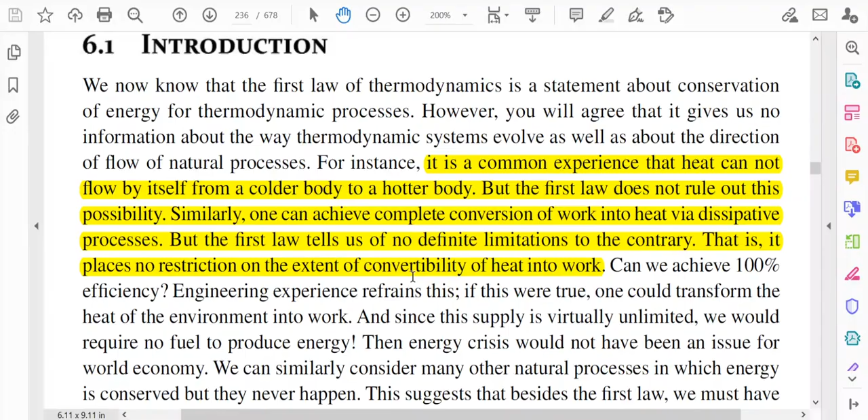So to discuss the second law of thermodynamics, at first we should have some concept of heat engines. We know that heat flows spontaneously from a hotter body to a colder body, just as we were discussing. If we intercept this flow with a machine, some of the heat can be converted into work.

So what is a heat engine? A machine that can convert heat into work is said to be a heat engine. That is the definition of heat engine.

Another thing is that if a heat engine operates, it should absorb heat at a higher temperature and reject heat at a lower temperature. Thus, a heat engine has to operate between two heat reservoirs.

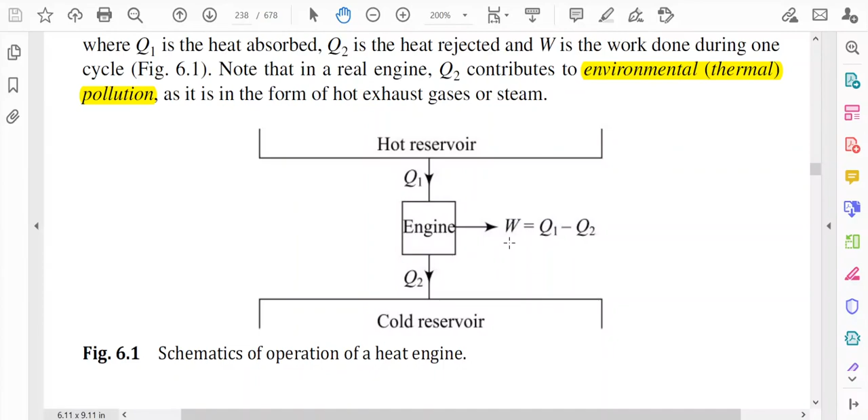Let us look at the figure. This is the schematic of operation of a heat engine. This one is the hot reservoir and this one is the cold reservoir. This is the engine. It is taking heat from the hot reservoir Q1, and it is rejecting heat Q2 to the cold reservoir, and the work performed by the engine W is equal to Q1 minus Q2.

Another thing about heat engines is that the processes which take place inside an engine must not cause permanent changes. This means that an engine has to operate in a cycle. How it operates in a cycle, we will discuss later on, but the point is that a heat engine should operate in a cycle.

The material used in the operation of an engine is called the working substance. The working substance can be solid, liquid, gas, or some paramagnetic substance.

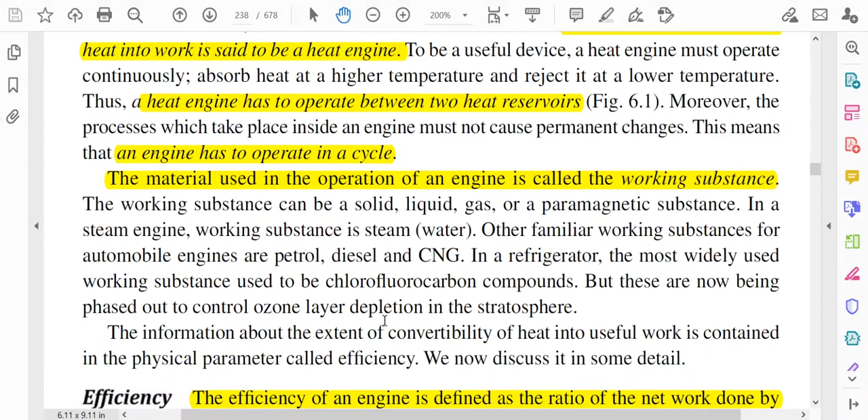In a steam engine, the working substance is steam, that is water. Other familiar working substances for automobile engines are petrol, diesel, CNG, etc. In a refrigerator, the most widely used working substance used to be chlorofluorocarbon compounds, but these are now being phased out to control ozone layer depletion in the stratosphere. So whatever it is, there is some working substance inside the engine.

Now we will define an important parameter, that is the efficiency of an engine. The efficiency of an engine is defined as the ratio of the net work done by it to the heat absorbed during one complete cycle, and the symbol of the efficiency is eta, and eta is equal to useful work done divided by heat absorbed.

After one complete cycle, the engine returns to its original state. Therefore, there will be no change in its internal energy, delta U is equal to 0. So from the first law, we have delta U, that is equal to Q1 minus Q2 minus W, that is equal to 0.

We know the first law is dQ is equal to dU plus dW. So from that concept, we are writing delta U is equal to Q1 minus Q2, that is dQ, minus dW, or we are writing here just W, that is equal to 0. So W is equal to Q1 minus Q2.

Q1 is the heat absorbed and Q2 is the amount of heat rejected. W is the work done during one complete cycle.

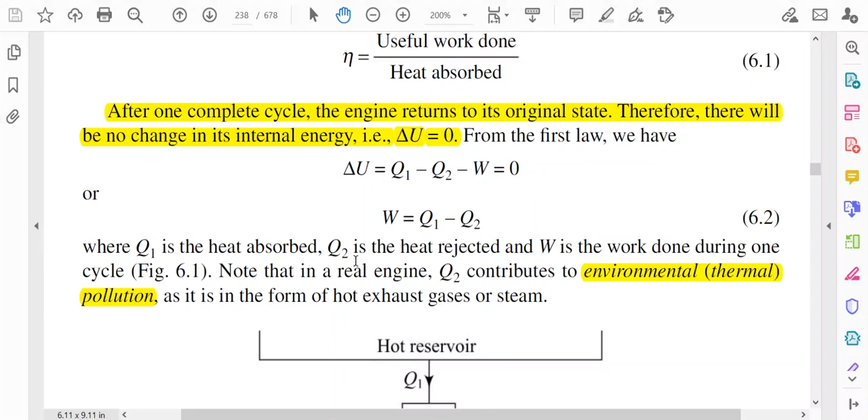Note that in a real engine, Q2 contributes to environmental pollution. Why? Because it is in the form of hot exhaust gases or steam, which is emitted from the engine. As it is being exhausted into the surroundings, the Q2 heat contributes to environmental pollution or thermal pollution.

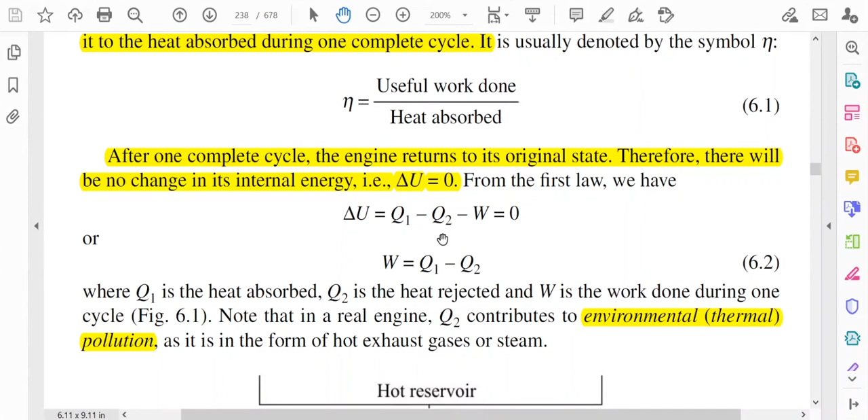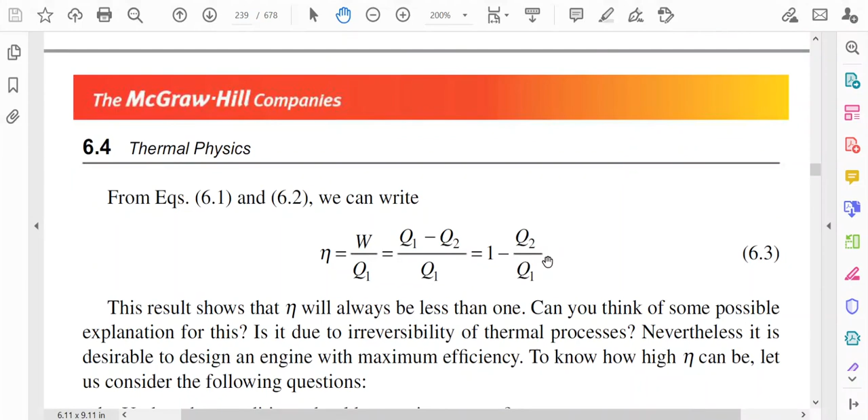Now, if we use these two equations, that is 6.1 and 6.2, you see that useful work done, W is equal to Q1 minus Q2, and what is heat absorbed, that is Q1. If you use some algebraic rearrangement, then from 6.1 and 6.2 we can write eta is equal to W by Q1, which is equal to Q1 minus Q2 divided by Q1, equal to 1 minus Q2 by Q1. This result shows that eta will always be less than 1, because 1 minus Q2 by Q1, these two are positive parameters, so eta must be less than 1.

Now, what is the explanation that eta must be less than 1? Is it due to the irreversibility of thermal processes? Nevertheless, it is desirable to design an engine with maximum efficiency. To know how high eta can be, let us consider the following questions.

So what are the questions? First, under what conditions should an engine operate, and does the choice of a working substance play some role? These are two basic questions. So we will answer this question.

Now, Carnot was the first researcher who recognized that for maximum efficiency, a heat engine should be thermodynamically reversible. That is, all stages of operation should be carried out infinitely slowly so that there are no dissipative losses such as friction or turbulence to waste energy. In practice, however, there are always some losses.

We know that fact. The simplest reversible cycle is due to Carnot. In Carnot engine, the working substance is made to exchange heat with heat reservoirs, and we will discuss the Carnot engine in detail. However, it may be mentioned that any heat engine operating in a Carnot cycle is called a Carnot engine. So that engine which is operated in a Carnot cycle, we will call it Carnot engine. And another important fact is that a heat engine should be thermodynamically reversible to obtain the maximum efficiency.

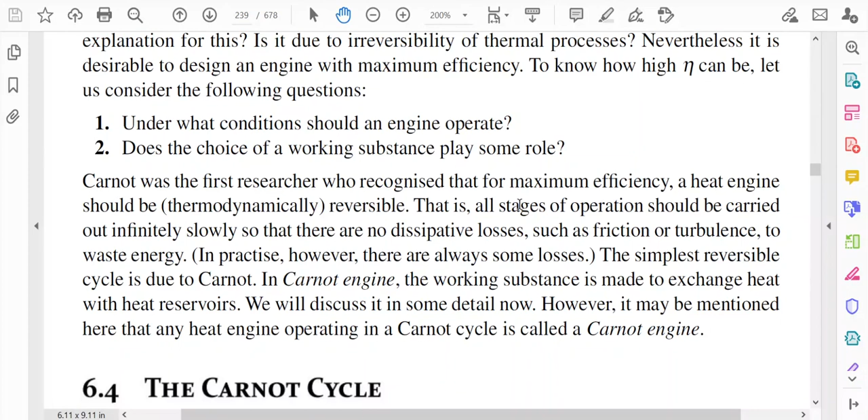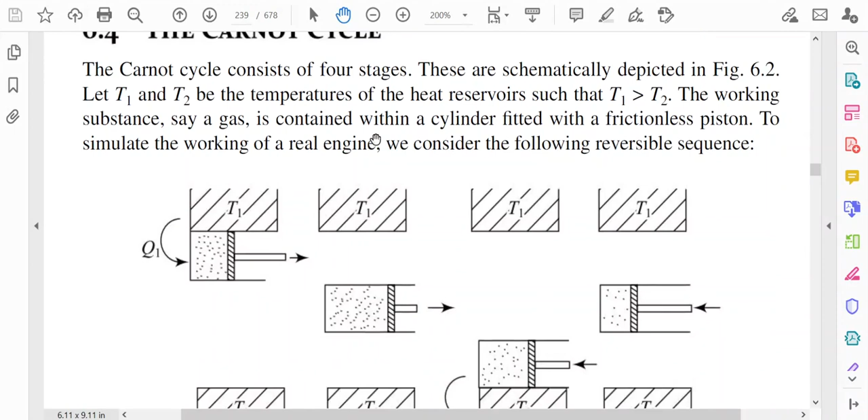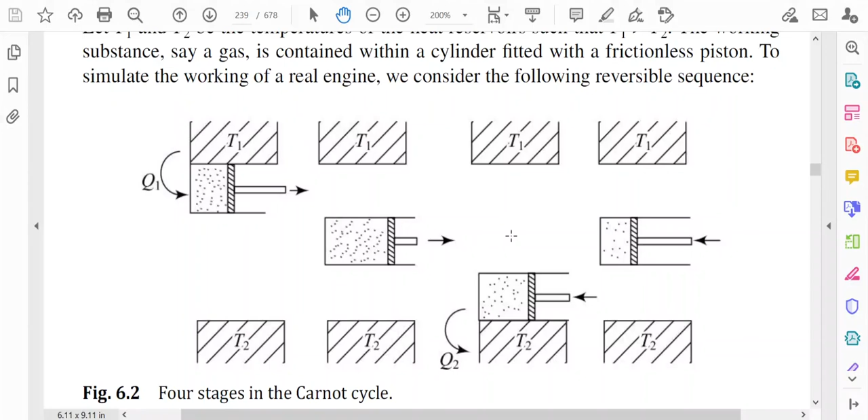Now we will discuss about the Carnot cycle. The Carnot cycle consists of 4 stages. These are depicted in this figure. In this figure, these 4 stages - this is the first stage, this one is the second stage, third stage, and fourth stage - have been depicted here.

T1 and T2 are the temperatures of the hot reservoir and cold reservoir respectively, that is, T1 is greater than T2. The working substance is a gas, contained in a cylinder fitted with a frictionless piston. You see the term frictionless piston, as we are avoiding the dissipative losses.

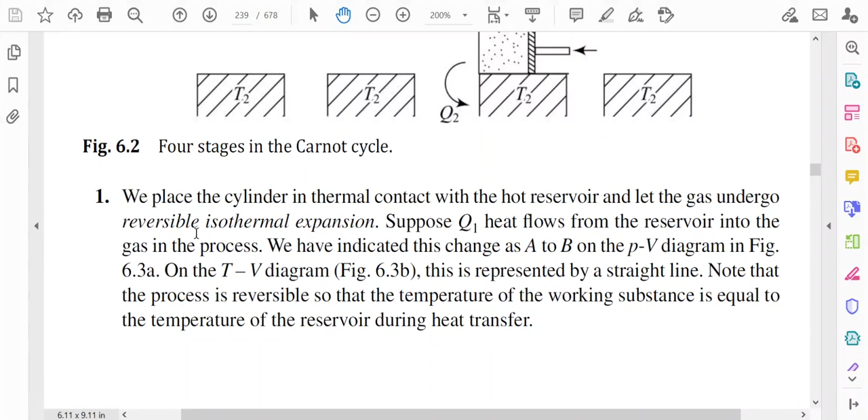To simulate the working of a real engine, we consider the following reversible sequence. This sequence is a reversible one - this is also an important fact. So first step, we place the cylinder in thermal contact with the hot reservoir and let the gas undergo reversible isothermal expansion. So the expansion is isothermal, and we have already said the processes are reversible. So the first process is isothermal expansion.

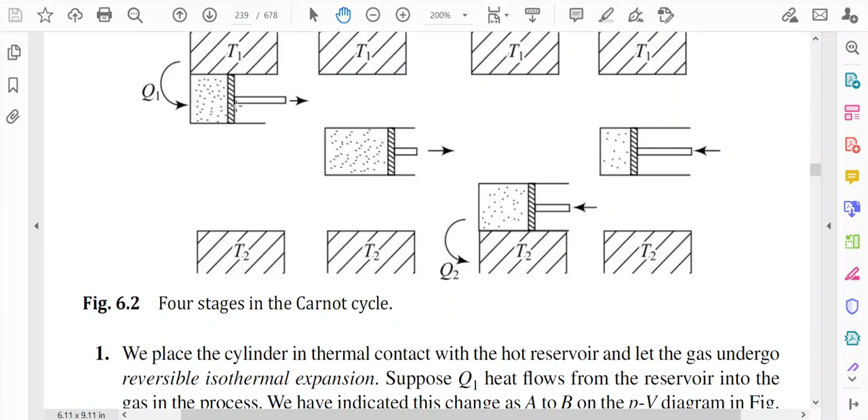You see the cylinder is in touch with the hot reservoir and it is absorbing heat Q1. As a result, the piston moves outward and the gas is being expanded. So this expansion is isothermal expansion. Suppose Q1 heat flows from the reservoir into the gas in the process.

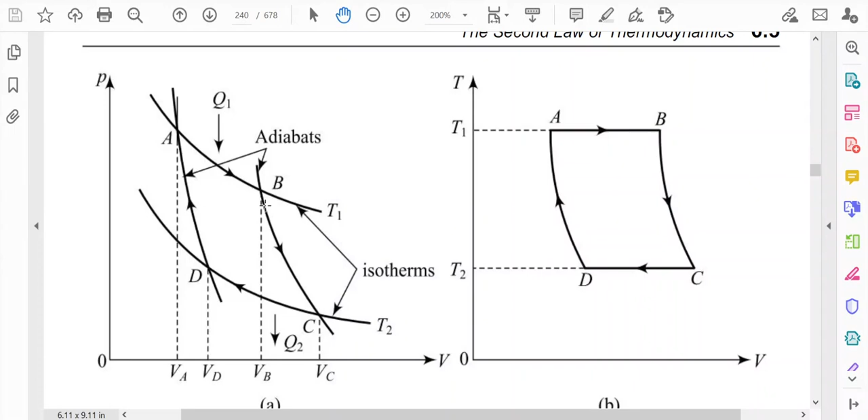We have indicated this change as A to B on the PV diagram. We have shown a diagram, that is the PV diagram - this one is the PV diagram. This AB process is the isothermal process occurring in stage 1, and Q1 is being absorbed by the cylinder, that is why we have shown Q1 in the downward direction. So process AB is the reversible isothermal process.

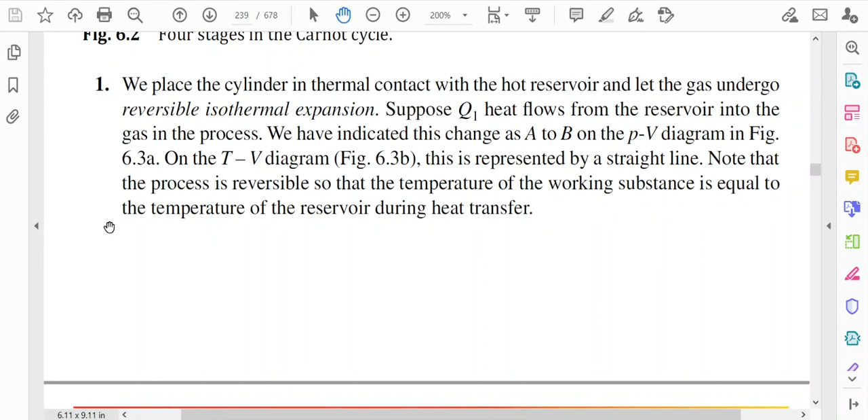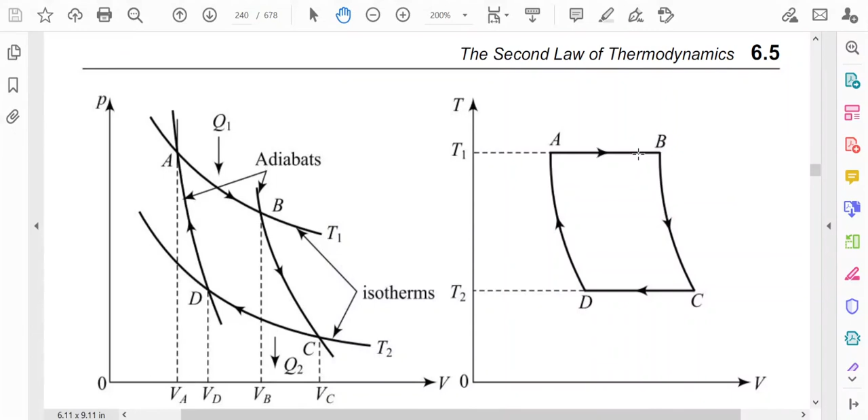On the TV diagram, this is represented by a straight line, and note that the process is reversible so that the temperature of the working substance equals the temperature of the reservoir during heat transfer. As the cylinder is in touch with the hot reservoir, its temperature T1 will be fixed, and temperature is not changing in this process. That is why it is a straight line parallel to the V axis. So this is the process in the TV diagram.

Now the work done by the gas on the surroundings is given by W1 equals integration from A to B of P dV. From the first law of thermodynamics, for an isothermal process W1 equals Q1, since delta U equals 0 — there is no change of internal energy for the reversible isothermal process. That is why W1 equals Q1.

Using the equation of state for n moles of an ideal gas, we write W1 equals Q1, using the ideal gas equation PV equals nRT. So P equals nRT1 by V, and we write nRT1 outside the integration. This gives integration of dV by V, with lower limit VA and upper limit VB. So this equals nRT1 ln(VB/VA). This is the work done in stage 1 of the thermodynamic process, where VB and VA are the volumes of the gas in states B and A respectively.

Next, we thermally isolate the gas and let it undergo reversible adiabatic expansion. This should be reversible as said earlier, but the expansion is now adiabatic, so there will be no heat exchange with the surroundings. The temperature of the working substance falls from T1 to T2, the temperature of the cold reservoir. This change is indicated as B to C on the PV diagram. In this process, work is done by the gas on the surroundings.

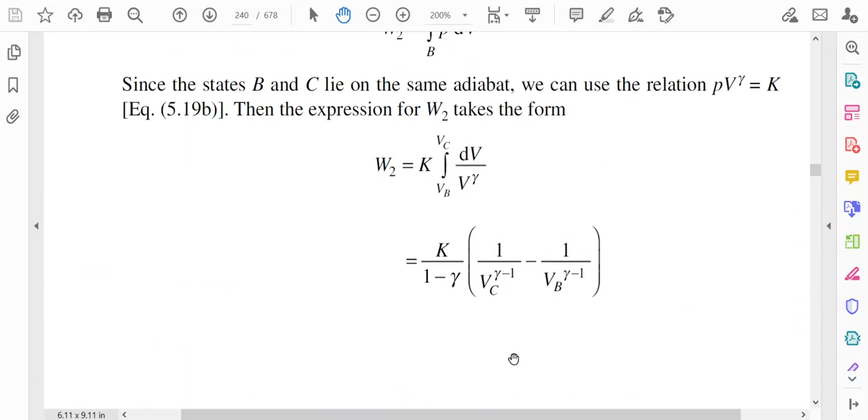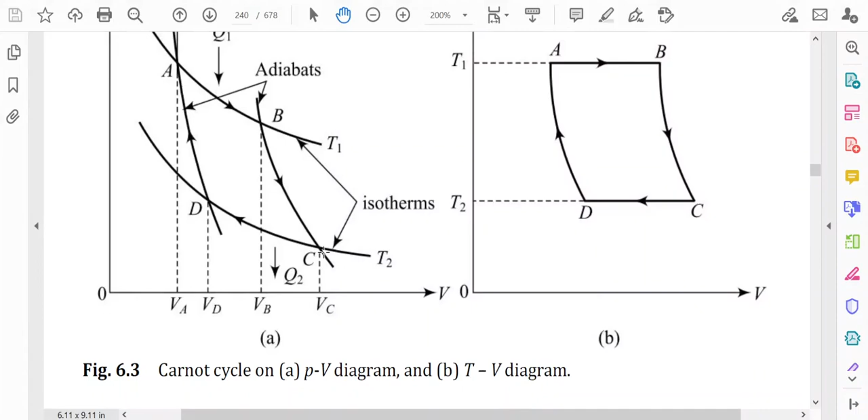This is the amount of work done, and we can simplify this relation further using PV to the power gamma equals K, along with PC VC to the power gamma equals K equals PB VB to the power gamma. This equation gives the amount of work done, shown in the figure. This BC process is a reversible adiabatic process, so PV to the power gamma equals K is valid, where VB is the volume in state B and VC is the volume in state C. So we have calculated the work done in the reversible adiabatic process.

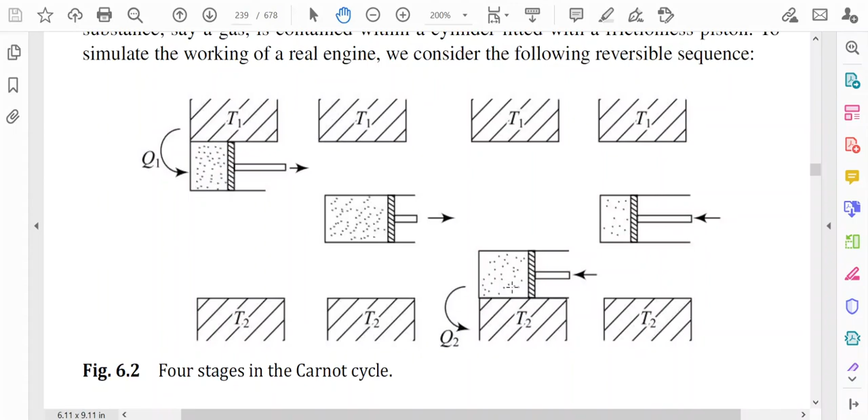Note that the gas is now at relatively low pressure, because the temperature is low, so pressure is also low. Initially it was at temperature T1, but now at state C it is at temperature T2. After the expansion, the temperature lowers step by step from T1 until it equals the temperature of the cooled reservoir, T2. So now the gas is at temperature T2, the temperature of the cooled reservoir, and is in low pressure.

To be used in a cyclic order, the gas has to be restored to its initial state. So our aim is to restore the initial state of the cylinder. To this effect, the gas is compressed in two stages.

First isothermally and then adiabatically, we place the cylinder in thermal contact with the cooled reservoir at lower temperature. Step by step the temperature of the cylinder will be lowered, keeping the cylinder in thermal contact with the low temperature reservoir T2.

So that is why the gas will be ultimately compressed, and we will compress the gas at first isothermally and reversibly. Suppose Q2 heat is given up by the gas to the cold reservoir. This change is indicated as C to D. Let us look at the figure again. You see that now at the point C the temperature is T2, that is the temperature of the cooled reservoir.

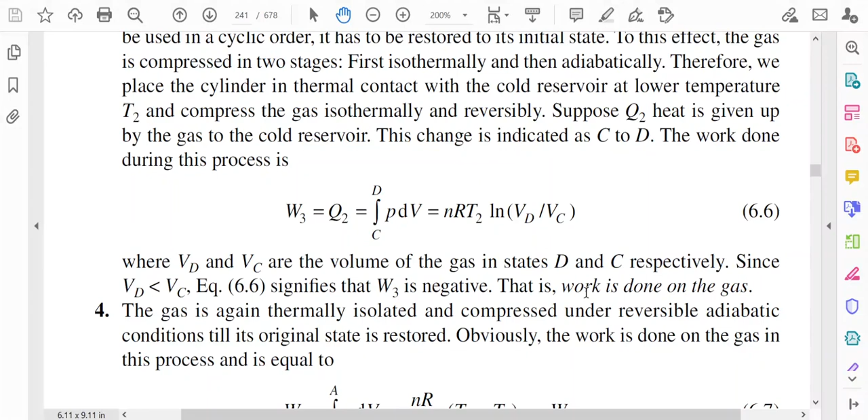The gas is not doing any work; instead work is done on the gas, and the gas is again thermally isolated and compressed under reversible adiabatic conditions until its original state is restored. This is now the fourth stage, where we again compress the gas, but now the process is adiabatic, and just like the previous three processes, we can calculate the work done.

The limits will be Vd to Va. We again use the equation for the adiabatic process, Pv to the power gamma equals constant, and just like stage 2, we will not repeat all the calculation. In stage 2 the work was nR(T1-T2)/(gamma-1). In this case it will be nR(T2-T1)/(gamma-1), equal to minus W2, because W2 was just the opposite of that.

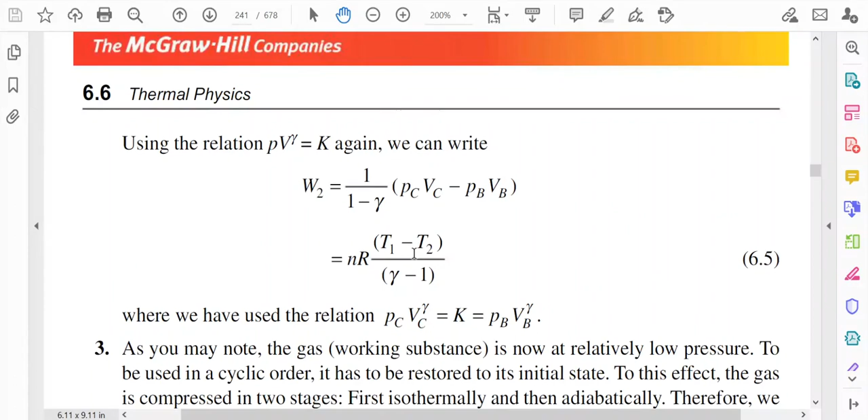You see the expression again: in W2 the numerator was T1 minus T2, and here the numerator is T2 minus T1. So this value is just the opposite of the work done in stage 2. As T2 is less than T1, W4 is a negative quantity, indicating that work is done on the gas during adiabatic compression.

Now the Carnot cycle is a curvilinear quadrilateral on the PV diagram. The net effect of this cycle is that we have extracted heat Q1 from the source at temperature T1 and put back heat Q2 at temperature T2. In this process, the total work done by the gas W equals the closed integral of PdV. We use a closed integration because it is a cyclic process, so that will be equal to W1 plus W2 minus W3 minus W4.

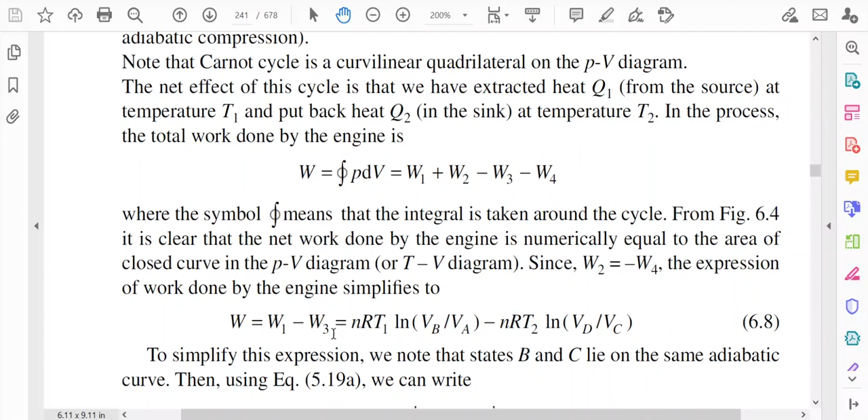This closed integration means the integral is taken around the cycle, and from the figure it is clear that the net work done by the engine is numerically equal to the area of the closed curve in the PV diagram. Since we have already shown W2 equals minus W4, the ultimate expression for the work after simplification becomes W equals W1 minus W3, that is nRT1 ln(Vb/Va) minus nRT2 ln(Vd/Vc).

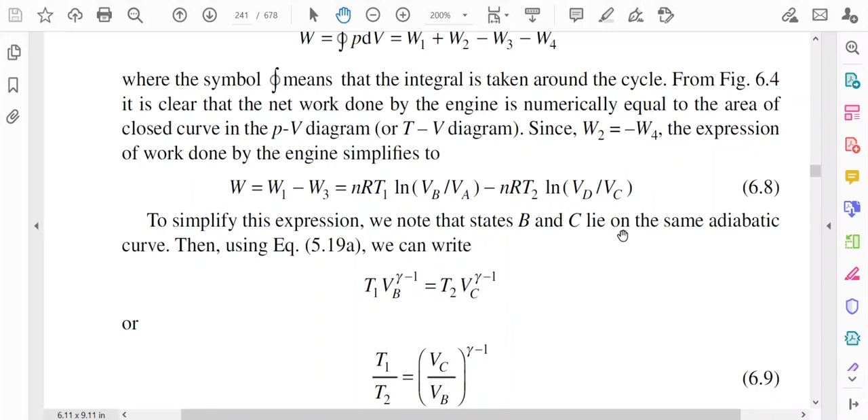We can further simplify by noting that states B and C lie on the same adiabatic curve, so we can use the TV relation of the adiabatic process: T1 Vb to the power gamma minus 1 is equal to T2 Vc to the power gamma minus 1, because B and C lie on the same adiabatic curve. That is why we can use the TV relation.

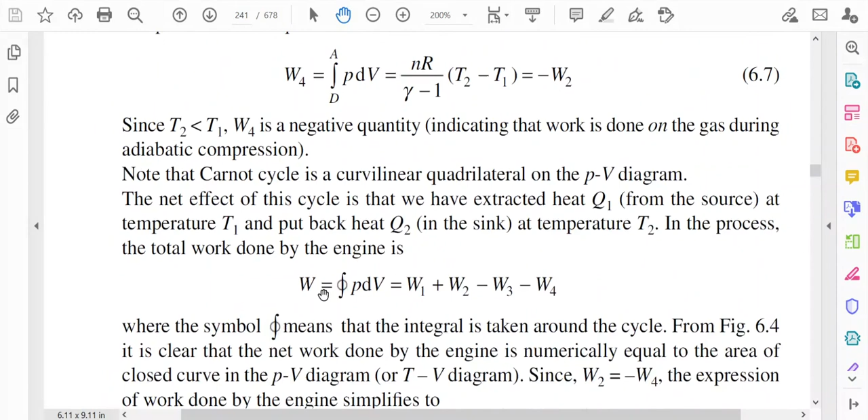After using the TV relation, ultimately T1 by T2 equals Vc by Vb to the power gamma minus 1. Similarly, for states D and A, we use the same type of adiabatic relation because D and A are on the same curve. Just like the previous process, we can show that T1 by T2 equals Vd by Va to the power gamma minus 1.

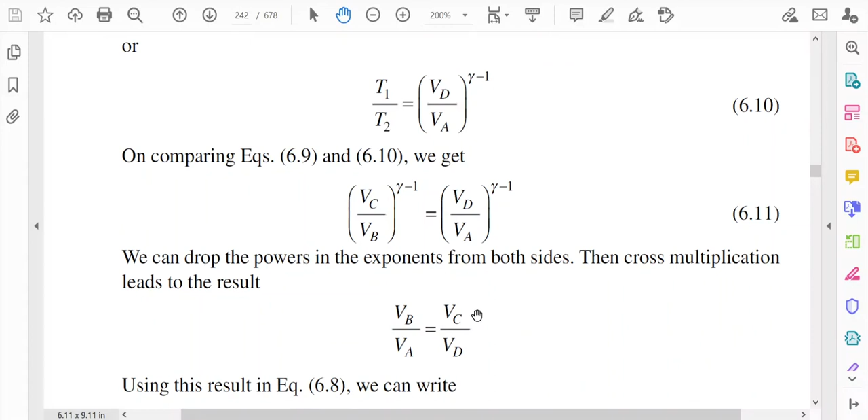Now if we compare this equation, 6.9 and 6.10, we can write that Vc by Vb to the power gamma minus 1 equals Vd by Va to the power gamma minus 1. After further simplification, dropping the exponents, we can write Vb by Va equals Vc by Vd.

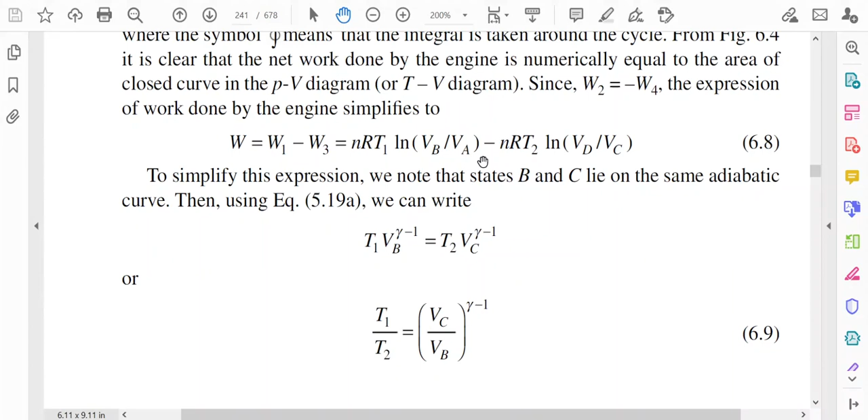And if we use this result in equation 6.8, where we calculated the total work done in the cycle, it simplifies the equation, and we get W equals nR(T1 minus T2) ln Vb by Va.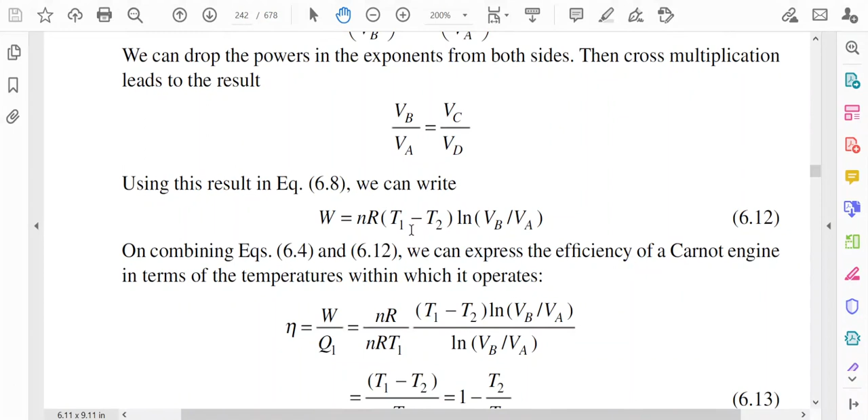Now we can further simplify by combining equation 6.4 and 6.12. What was equation 6.4? Let me show you again. Equation 6.4 was W1 equals Q1 equals nRT1 ln Vb by Va.

After using that equation, we can write eta equals W by Q1, which equals nR by nRT1 into T1 minus T2 ln Vb by Va, divided by ln Vb by Va, using equation 6.4 for the expression of Q1. Ultimately, the expression for eta becomes 1 minus T2 by T1.

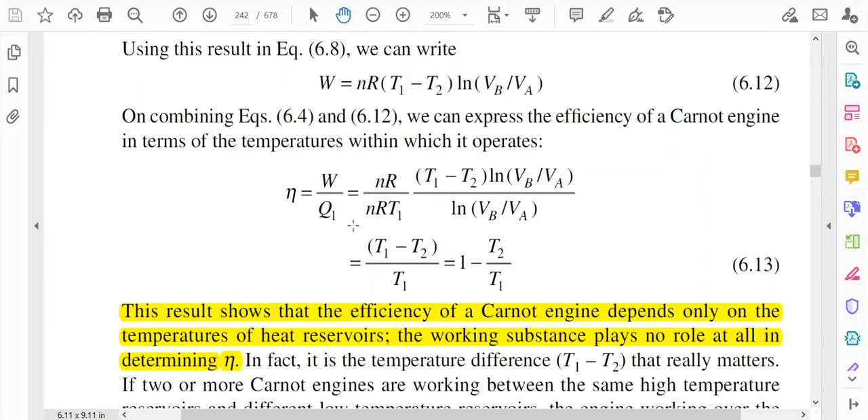This is a very important result. It shows that the efficiency of a Carnot engine depends only on the temperatures of the heat reservoirs, because on the right hand side there is only T1 and T2, the temperatures of the reservoirs. The working substance plays no role at all in determining eta.

That is another important fact: the working substance plays no role at all in the determination of eta. In fact, it is the temperature difference T1 minus T2 that really matters. If two or more Carnot engines are working between the same high temperature reservoir and different low temperature reservoirs, the engine working over the greater temperature difference will have the higher efficiency, because it is the temperature difference that actually matters.

Usually T2 is limited to the temperature of the surroundings of the engine, that is room temperature, and the efficiency depends on the temperature of the heat source. This is one of the important findings, because in the expression for eta, T2 is the low temperature reservoir. But in the practical case, what temperature will we use?

This temperature is the temperature of the surroundings. For example, a steam engine is running—what will be the low temperature reservoir? It is actually the surroundings into which the heat is being transferred. So T2 is the temperature of the surroundings of the engine, almost 300 Kelvin, and we cannot change this limit of the low temperature reservoir. Ultimately the efficiency of a heat engine depends on the temperature of the heat source only.

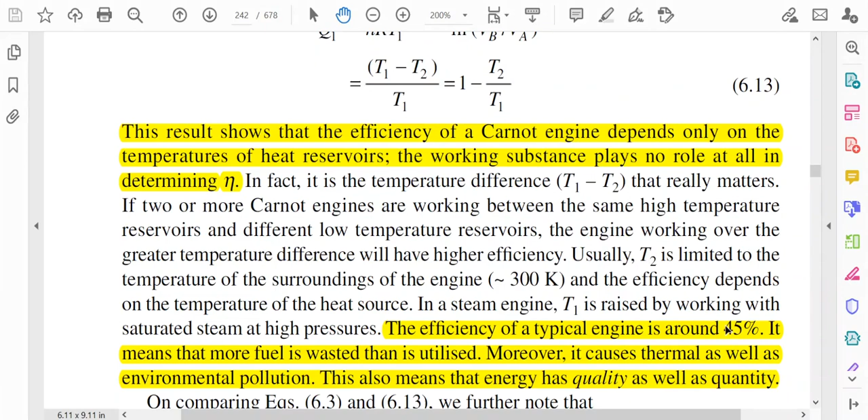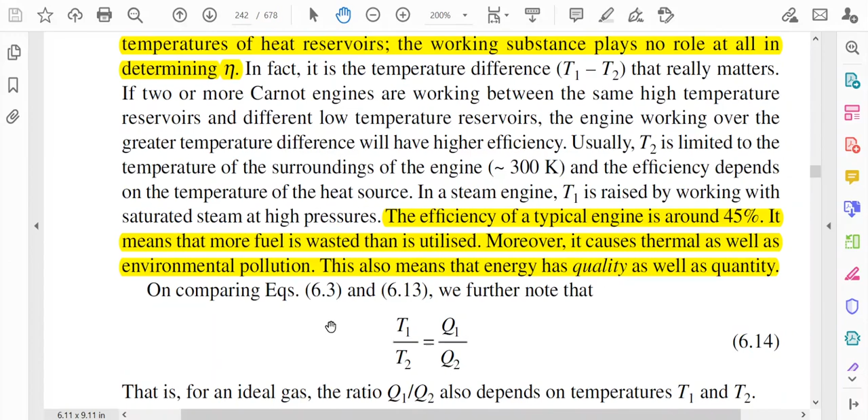So that is why we are saying the quality is involved in a heat engine. Now this is equation 6.13, and if we use equation 6.3, we can write eta is T1 by T2 is equal to Q1 by Q2.

So what was equation 6.3? Let us check it again. Equation 6.3 was this one, that is the expression for the eta. Expression for the eta is equal to 1 minus Q2 by Q1.

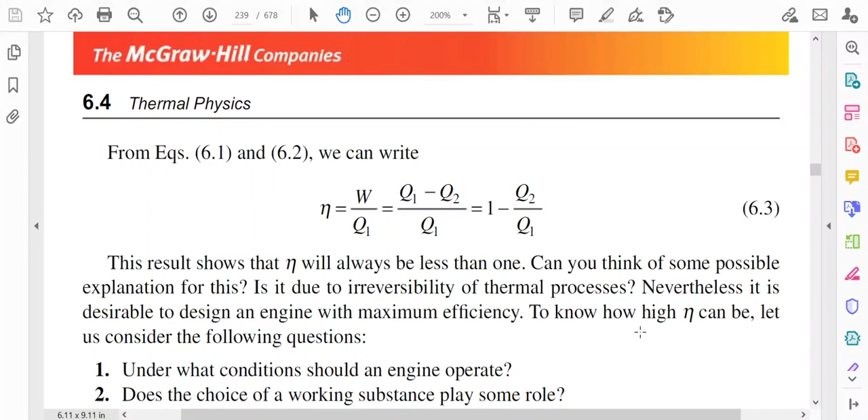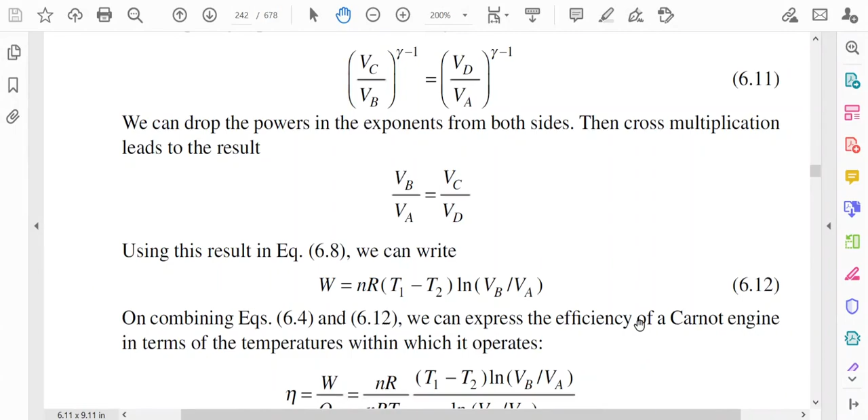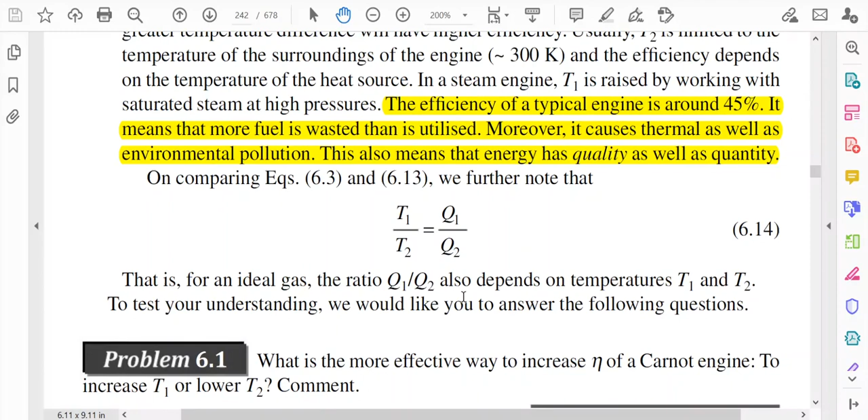As we discussed earlier in the definition of eta, we said that eta is equal to 1 minus Q2 by Q1. But in Carnot's engine, the eta is equal to 1 minus T2 by T1. So by comparing, we see T1 by T2 is equal to Q1 by Q2. That is, for an ideal gas, the ratio Q1 by Q2 also depends on temperatures T1 and T2.

Now we will discuss this topic, that is the Carnot cycle as a refrigerator. We all have heard about the term refrigerator. So one of the beautiful aspects of a Carnot engine is that we can run the whole system backward, so that the sequence of events and their functions are reversed. So you have to assume that the Carnot engine is working in the reverse way.

We have already shown the schematic diagram of a Carnot engine. It is absorbing heat Q1 from the hot reservoir, and Q2 amount of heat is being rejected in the cold reservoir, and the work done by the engine W is equal to Q1 minus Q2. So that was the concept of a heat engine.

But if the whole system runs in the backward direction so that the sequence of events and their functions are reversed, the cycle working in the reverse direction will act as an ideal refrigerator in which heat is extracted from the reservoir at lower temperature and transferred to the reservoir at higher temperature. Therefore, in a sense, a refrigerator is also a heat engine.

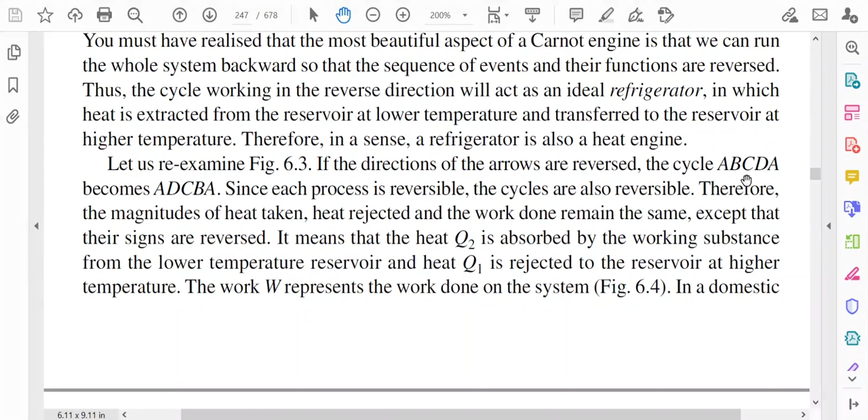Now we will examine figure 6.3. You see, if the directions of the arrows are reversed, the cycle ABCDA becomes ADCBA. So let us look at the figure again, figure 6.3.

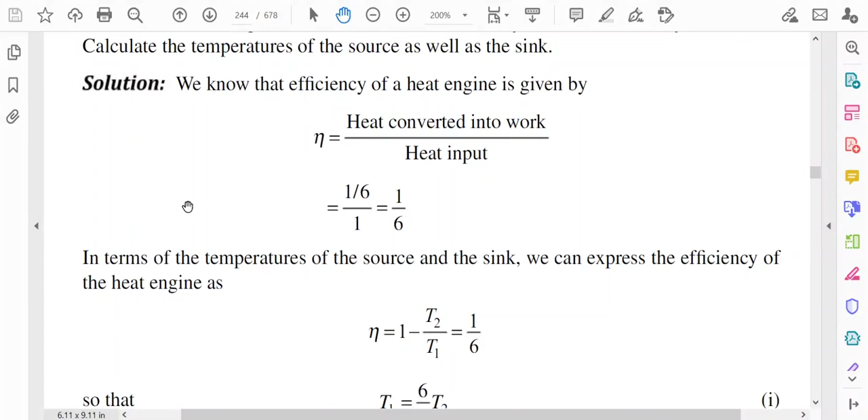Now if we reverse the direction of the arrow, that is suppose from A, D, C, B, A. Actually what we are doing is just reversing the direction of the process of the heat engine just described earlier. So similarly, when we are discussing the Carnot cycle, this cycle will also operate in the reverse way, and that will be the working concept for a refrigerator.

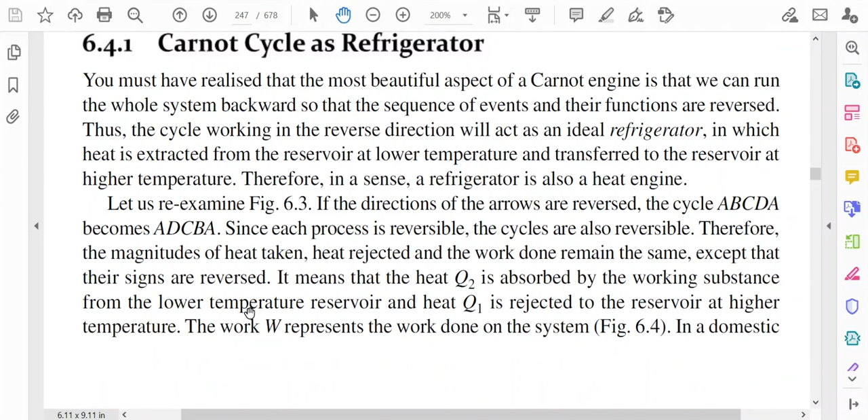So the cycle will be in the reverse direction, and cycle ABCDA becomes ADCBA. Since each process is reversible, the cycles are also reversible. Therefore, the magnitudes of heat taken, heat rejected, and the work done remain the same except that their signs are reversed. It means that the heat Q2 is absorbed by the working substance from the lower temperature reservoir and heat Q1 is rejected to the reservoir at higher temperature. The work W represents the work done on the system.

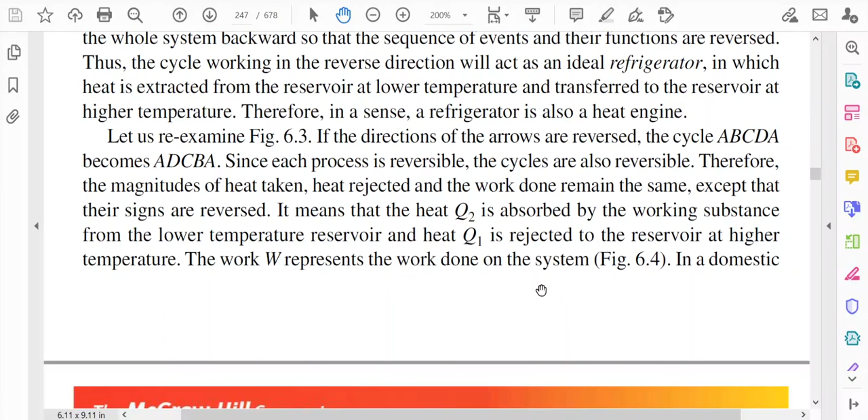So, in a domestic refrigerator, heat is pumped out of its interior, because we know that in our domestic refrigerator there is some food or edible substance inside. So in that case, what is done? Heat is pumped out, that means heat is taken from the food substances, and that amount of heat is pumped out of its interior, which is at a temperature lower than the surroundings, and work is done by the motor driving the refrigerator.

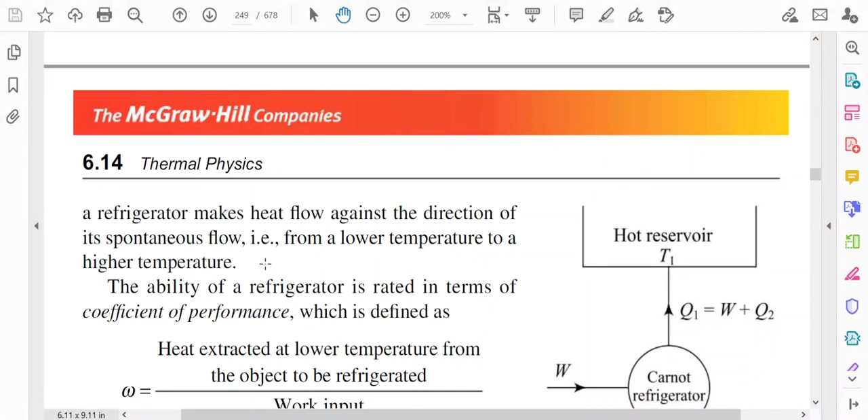Thermodynamically speaking, a refrigerator makes heat flow against the direction of its spontaneous flow, that is from a lower temperature to a higher temperature. So in a heat engine, heat flows from the higher temperature to the lower temperature, but in case of a refrigerator, heat flows from a lower temperature to a higher temperature.

So this is the figure of the cold reservoir, and the temperature of the cold reservoir is T2, and this one is the hot reservoir T1, and this one is the Carnot refrigerator. You see in the figure that the amount of heat absorbed from the cold reservoir is Q2, and the amount of heat rejected to the hot reservoir is Q1, and W amount of work is done by the motor.

Actually there is a motor in the refrigerator, so that is doing some work. As heat is being taken out from the cold reservoir, you must do some work, otherwise you cannot take heat from a cold reservoir, and that heat is being rejected into the hot reservoir. So there should be some motor doing work W inside the refrigerator. So this is W, and Q1 is equal to W plus Q2.

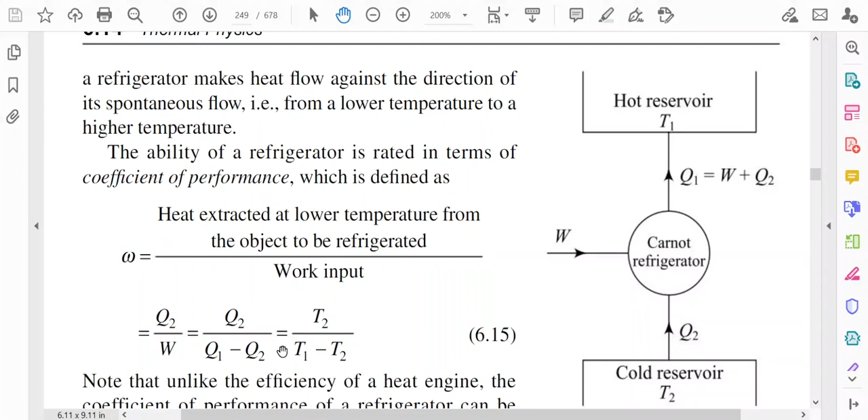Now the ability of a refrigerator is rated in terms of coefficient of performance. What is the definition of the coefficient of performance? Omega, that is equal to heat extracted at a lower temperature from the object to be refrigerated, divided by the work input. So omega equals Q2 by W, that is equal to Q2 divided by Q1 minus Q2, that is equal to T2 divided by T1 minus T2.

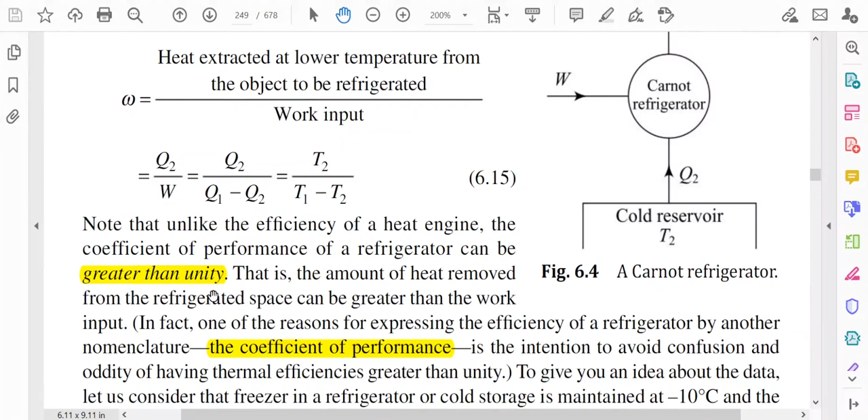Note that unlike the efficiency of a heat engine, the coefficient of performance of a refrigerator can be greater than unity. That is, the amount of heat removed from the refrigerated space can be greater than the work input. Again, you should understand this fact very clearly: unlike the efficiency of a heat engine, the coefficient of performance of a refrigerator can be greater than unity. In fact, one reason for expressing the efficiency of a refrigerator by another nomenclature, the coefficient of performance, is to avoid confusion and the oddity of having thermal efficiencies greater than unity.

To give an idea, let us consider that a freezer in a refrigerator or cold storage is maintained at minus 10 degrees centigrade and the room temperature is 30 degrees centigrade. We can readily calculate the maximum value of coefficient of performance, omega. Converting those to Kelvin scale, using equation 6.15 and T2 divided by T1 minus T2, it becomes 263 by 40, that is equal to 6.58.

You must have seen a household refrigerator. Here, the work is done by an electric motor and the working substance is Freon 12, which has a boiling point of minus 29 degrees centigrade, so Freon 12 is a gas at room temperature. More specifically, Freon gas in a tube is made to expand suddenly from a high pressure to a low pressure. In this process, it cools as it expands suddenly. This is like the process of Joule-Thomson expansion.

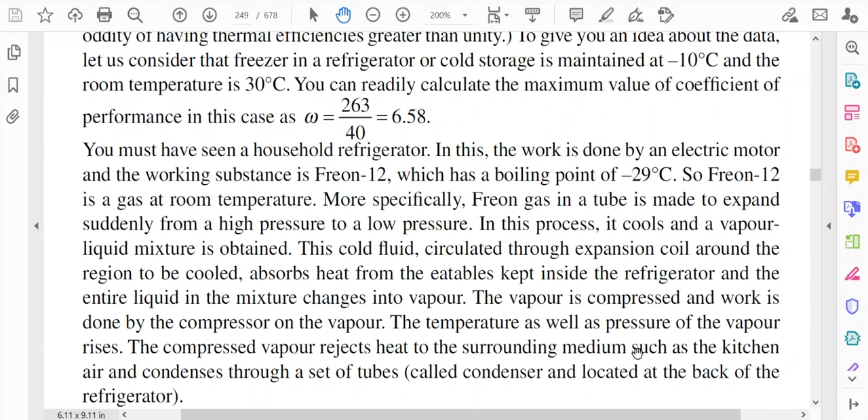The compressed vapor rejects heat to the surrounding medium, such as the kitchen air, and is again condensed through a set of tubes called the condenser, located at the back of the refrigerator. It has been observed that CFC, chlorofluorocarbon, adversely affects the life-protecting ozone layer in our atmosphere, so there is now growing emphasis on phasing out CFCs in India. Non-CFC refrigerators are available now.

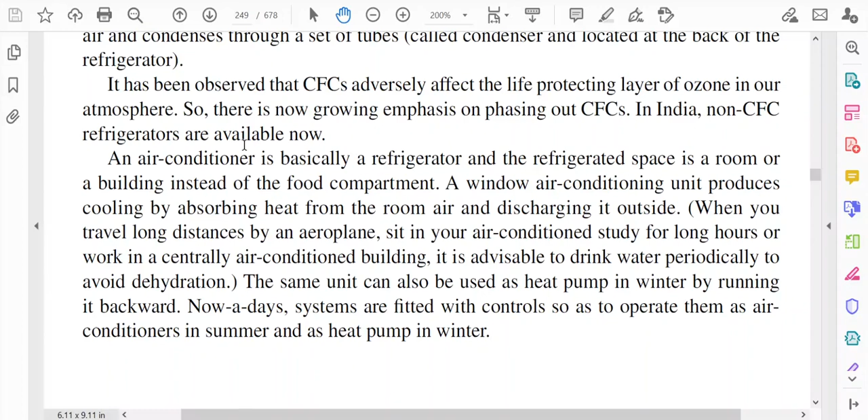In an air conditioner, the working principle is almost the same, but while the refrigerator takes heat from the edibles, the air conditioner takes heat from the room and discharges it to the outside surroundings. So this is the difference between the air conditioner and the refrigerator.

Now we will discuss two statements regarding the second law. The first statement is the Kelvin-Planck statement. The statement is: no process is possible whose sole result is complete conversion of heat into work. Again I repeat the statement: no process is possible whose sole result—you have to stress the words 'sole result'—I will discuss this fact later, but the point is that no process is possible whose sole result is complete conversion of heat into work.

This statement implies that one cannot devise a machine which will just absorb heat and produce 100% work. That is why it is said no process is possible whose sole result is the complete conversion of heat into work. Complete conversion means 100% conversion of heat into work, which is not possible as per the Kelvin-Planck statement.

However, let us consider isothermal expansion of an ideal gas. When the gas expands, it does work on the piston of the cylinder, and for an ideal gas, the first law tells us that during an isothermal process, the internal energy remains constant. So we can write the first law as delta U equals dq minus dw equals 0, because delta U equals 0. So dw equals dq. So we have complete conversion of heat into work as per equation 6.16, from the first law.

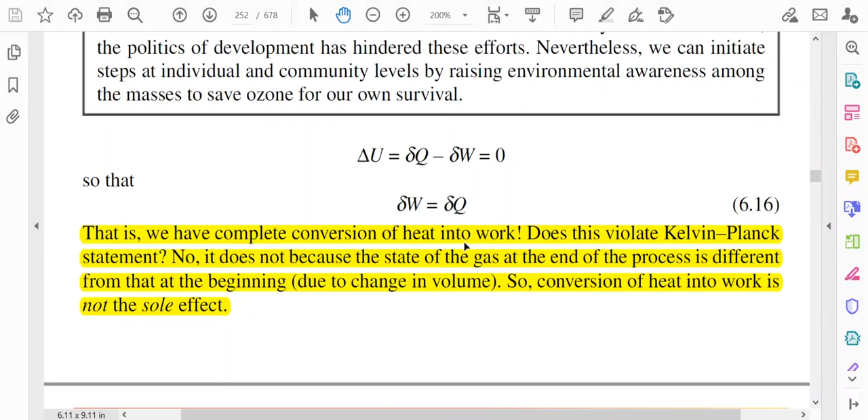So the Kelvin-Planck statement has not been violated here. And there are other processes in which energy is conserved but they do not occur. For example, heat does not flow on its own from a body at a lower temperature to a body at higher temperature. In this case, energy would be conserved, but these processes do not occur. That is, spontaneous heat flow is a unidirectional process - heat always flows from the hotter body to the colder body, and it flows spontaneously.

So this fact of experience is contained in the Clausius statement of the second law of thermodynamics. What is the Clausius statement? No process is possible whose sole result is the transfer of heat from a body at a lower temperature to a body at a higher temperature. Actually this is a fact of experience and needs no proof.

However, is the heat flow in a refrigerator from food items kept inside to the surroundings in violation of the Clausius statement? We have just discussed refrigerators, and we have seen that there is a flow of heat from the colder body, that is the food items, to the surroundings, that is to a hotter body. So is there any violation of the Clausius statement?

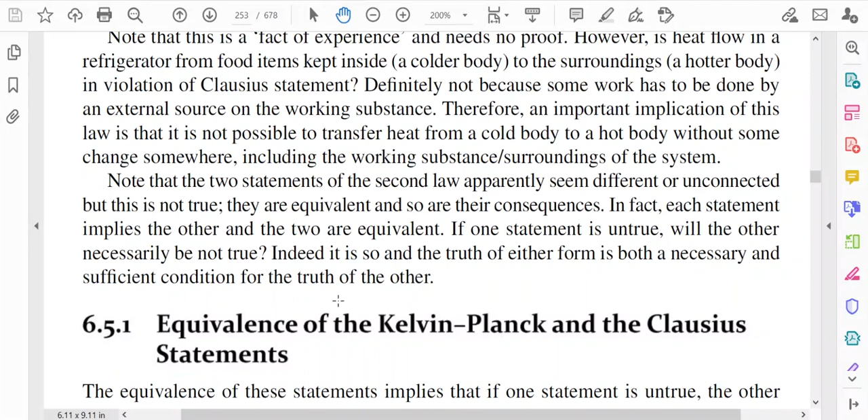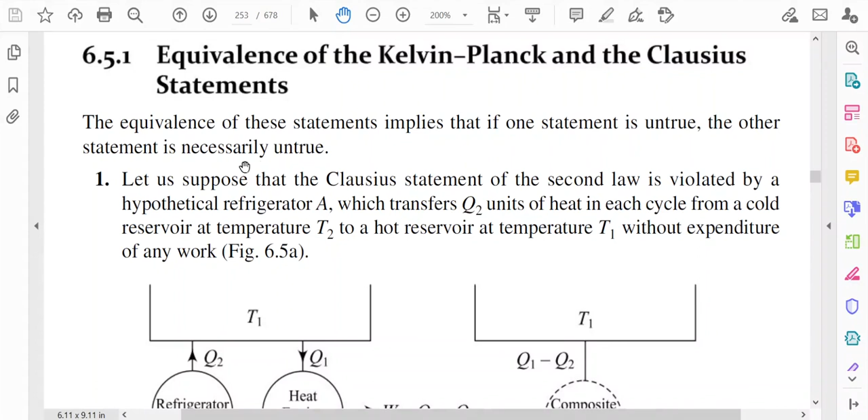So right now we will discuss the equivalence of the Kelvin-Planck and the Clausius statements, and we will show that the equivalence of these statements implies that if one statement is untrue, the other statement is necessarily untrue. So we will now discuss how this is possible. Let us suppose that the Clausius statement of the second law is violated by a hypothetical refrigerator A.

So we are assuming that the Clausius statement of the second law is violated by a hypothetical refrigerator A. This refrigerator transfers Q2 units of heat in each cycle from a cold reservoir at temperature T2 to a hot reservoir at temperature T1.

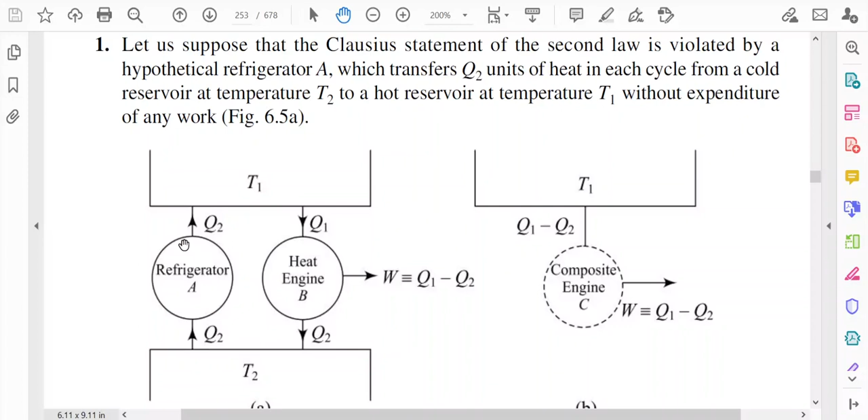So this is the refrigerator, taking heat Q2 from the cold reservoir, and that amount of heat is being rejected at the higher temperature. T2 is the low temperature and T1 is the high temperature. The refrigerator A is taking heat from the cold reservoir, and that amount of heat is rejected at the high temperature in each cycle.

This process is being performed without expenditure of any work. Actually it should not happen, but we are assuming that this is happening without expenditure of any type of work.

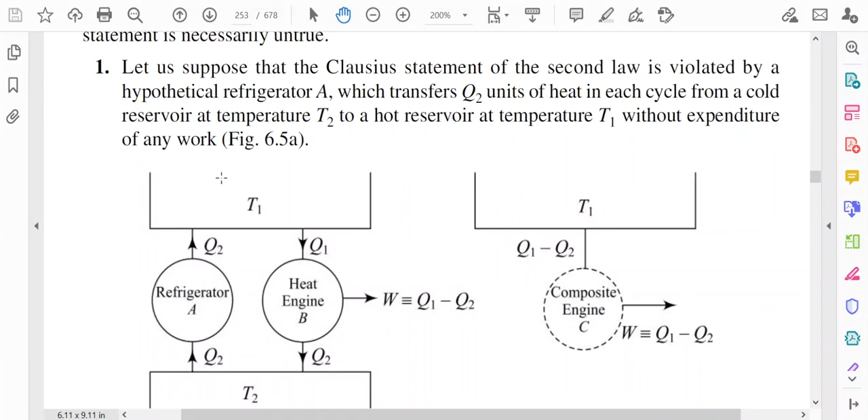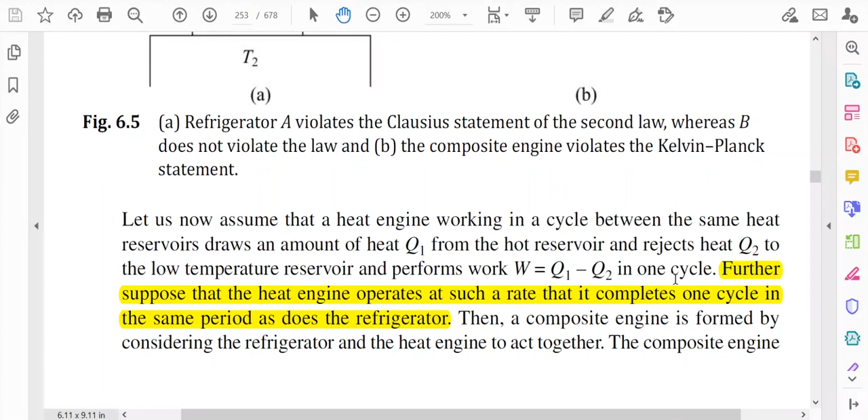Let us now assume that a heat engine working in a cycle between the same heat reservoirs draws an amount of heat Q1 from the hot reservoir and rejects heat Q2 to the low temperature reservoir, and performs work W equal to Q1 minus Q2 in one cycle. So Q1 amount of heat is taken from the hot reservoir, Q2 amount of heat is rejected to the cold reservoir, and work performed W equals Q1 minus Q2. So the heat engine is acting between the same two temperature limits.

Further, suppose that this heat engine operates at such a rate that it completes one cycle in the same period as the refrigerator, so the rate of completion of the cycle is the same for both. Then a composite engine is formed by considering the refrigerator and the heat engine to act together.

In this figure we are considering a composite engine, combining the heat engine and the refrigerator. For this composite engine, the amount of heat taken from the hot reservoir is actually Q1 minus Q2, because it is rejecting Q2 and taking Q1, so net Q1 minus Q2, and the work W equals Q1 minus Q2.

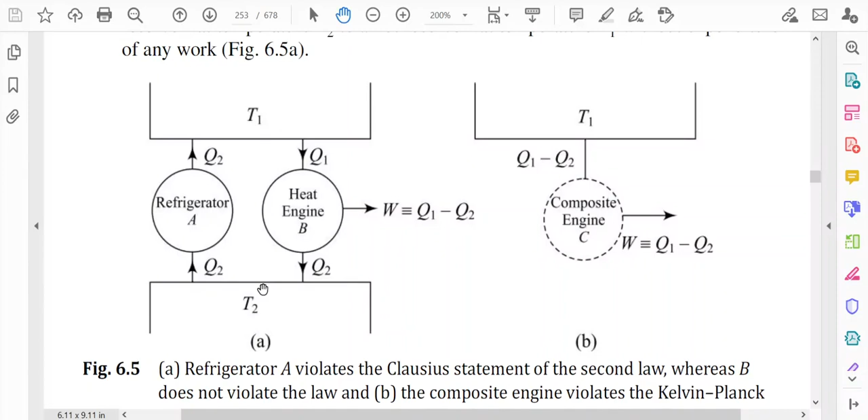From the cold reservoir, Q2 amount of heat is being rejected, and Q2 amount of heat is being taken. So ultimately, if we consider the combined engine, no heat is being taken from the cold reservoir. Now we will discuss this fact.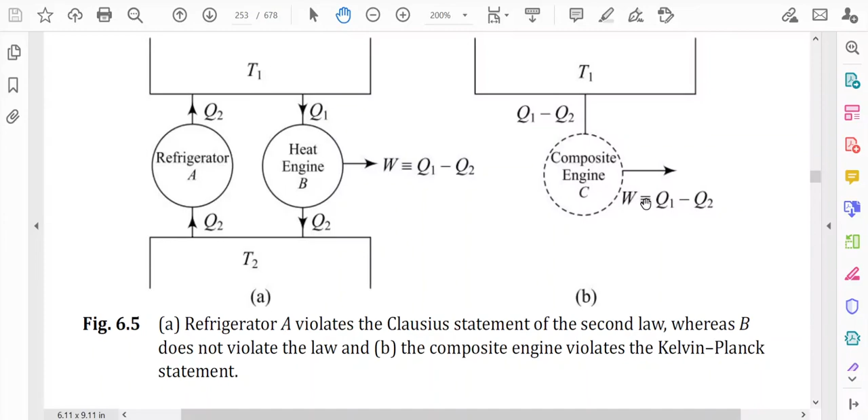So the composite engine draws Q1 minus Q2 from the hot reservoir and converts it completely into work. Looking at the figure more carefully, the combined heat engine takes Q1 minus Q2 heat from the hot reservoir and converts the whole amount into work, because here W equals Q1 minus Q2. It is not taking any heat from the cold reservoir, so ultimately it takes heat from the hot reservoir, Q1 minus Q2, and all of it is converted to work, with the amount of work equal to the amount of heat, W equals Q1 minus Q2.

So the point is that such an engine obviously violates the Kelvin-Planck statement, because as per the Kelvin-Planck statement, this should not happen — complete conversion of heat into work is not possible.

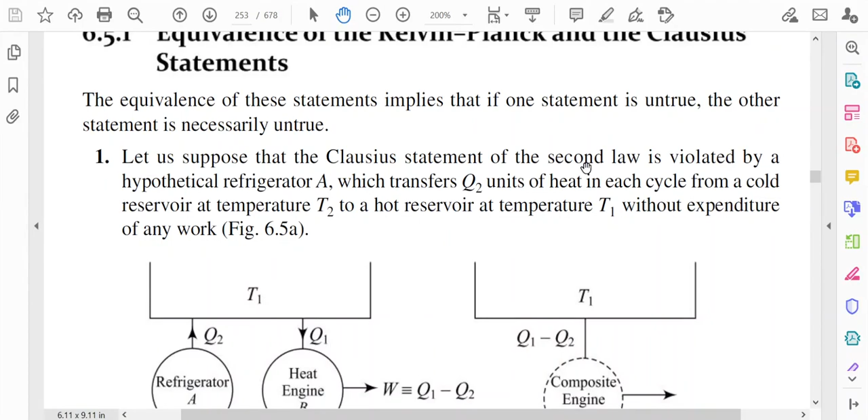So what we assumed was the violation of the Clausius statement in the beginning of this proof — that the second law is violated, the Clausius statement of the second law is violated. So if the Clausius statement of the second law is violated, then the Kelvin-Planck statement will also be violated.

Now we will prove it in a different way. First we will assume that the Kelvin-Planck statement is violated. If we show that the Kelvin-Planck statement is violated, the Clausius statement is also violated. So how do we show that?

Let us consider a hypothetical heat engine which extracts heat Q1 from the hot reservoir, converts it completely into work, and rejects no heat to the low temperature reservoir. In this figure, the heat engine takes heat Q1 from the hot reservoir and the work done W equals Q1 — it completely converts the heat into work, violating the Kelvin-Planck statement, and it does not reject any heat to the low temperature reservoir T2. So we have assumed that.

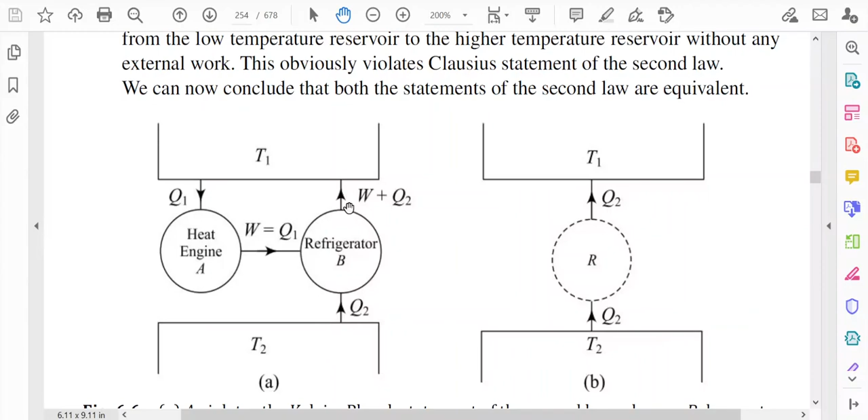Now suppose that the work performed by the heat engine is used to drive a refrigerator operating between reservoirs at temperatures T1 and T2. We assume that W amount of work is being performed on the refrigerator, and the refrigerator is taking heat Q2 from the cold reservoir and rejecting heat W plus Q2 to the hot reservoir. As before, we assume the refrigerator completes one cycle in the same period as the heat engine.

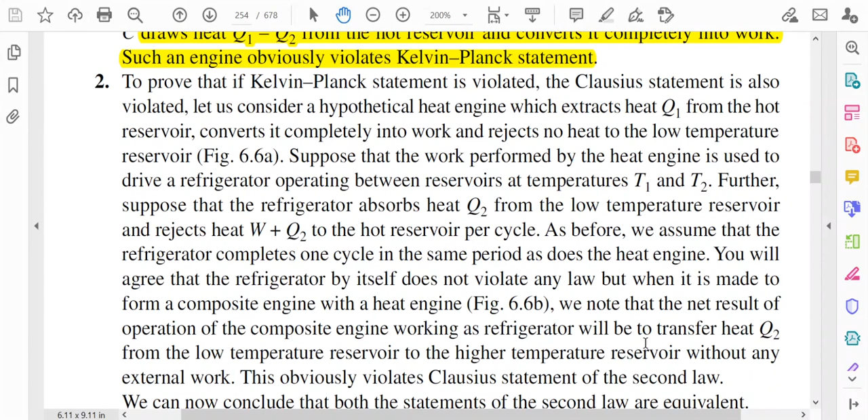The refrigerator by itself does not violate any law, but when it is made to form a composite engine with a heat engine, we note that the net result of operation of this composite engine working as a refrigerator will be to transfer heat Q2 from the low temperature reservoir to the higher temperature reservoir.

Let me show you again. Consider a composite engine: Q2 amount of heat goes into the refrigerator, Q1 amount of heat is taken, and W equal to Q1 is the work done on the refrigerator. So if work input is W, and the heat rejected is W plus Q2, then considering these together, W plus Q2 minus W means ultimately Q2 amount of heat is being rejected to the hot reservoir.

You see these two facts: you are inputting W amount of work, equivalent to Q1, and the heat rejected at the hot reservoir is W plus Q2. So ultimately Q2 amount of heat is being rejected inside the hot reservoir.

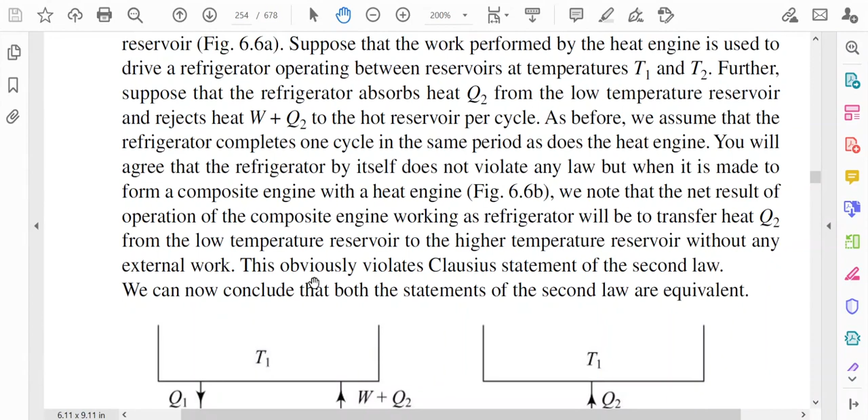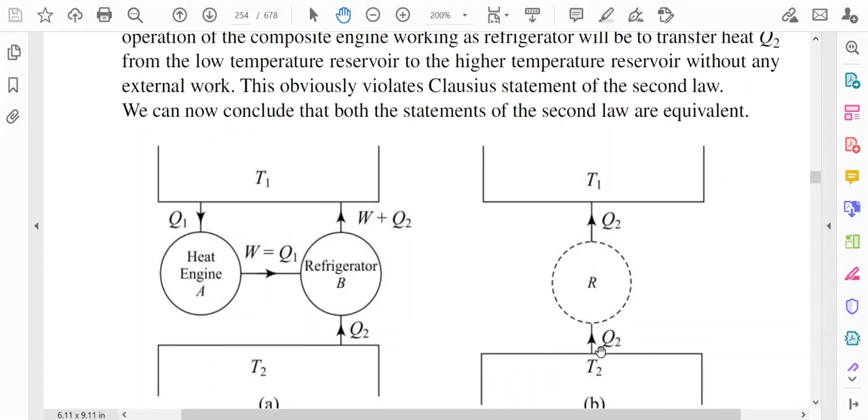So we know that the net result of operation of the composite engine working as a refrigerator will be to transfer heat Q2 from the low temperature reservoir to the higher temperature reservoir without any external work. The most important part is that no external work is done, because when we take the two engines as a composite engine, it is taking Q2 amount of heat from the cold reservoir and rejecting Q2 to the hot reservoir, with no work done on the refrigerator. As no work is done and heat is transferred from the cold to the hot reservoir, this obviously violates the Clausius statement of the second law.

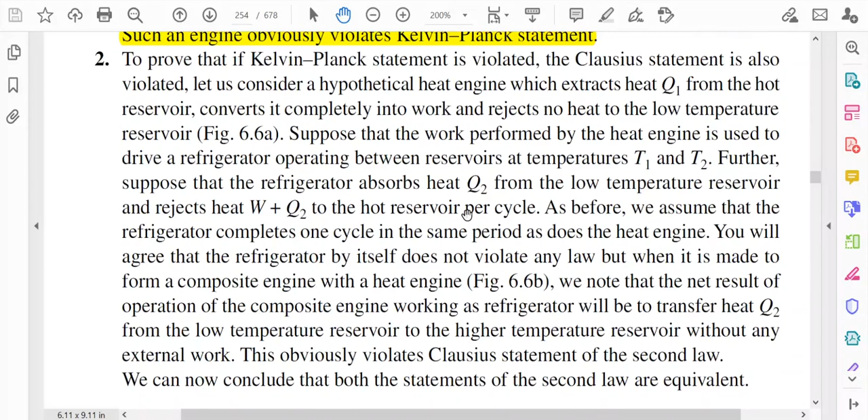So initially we assumed that the Kelvin-Planck statement is violated, and ultimately we have shown that the Clausius statement is also violated. So the two statements are equivalent in nature. One important conclusion is that the second law of thermodynamics completely rules out the so-called perpetual motion machine of the second kind.

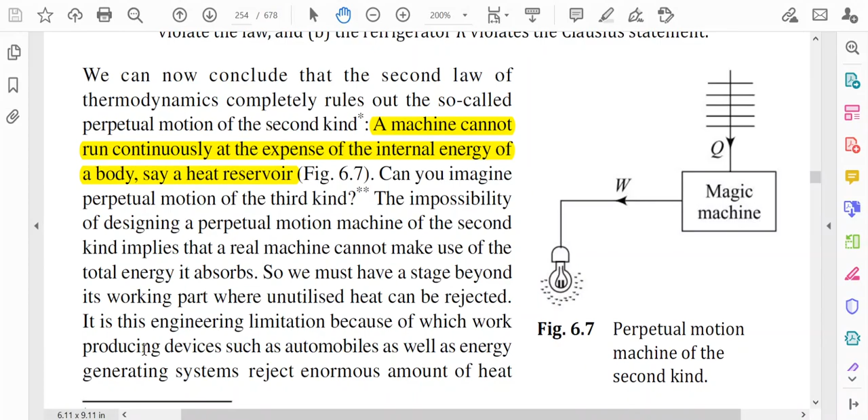This means a machine cannot run continuously at the expense of the internal energy of a body, say a heat reservoir. It cannot run continuously at the expense of the internal energy of a body, as complete conversion of heat into work is not possible. So the impossibility of designing a perpetual motion machine of the second kind implies that a real machine cannot make use of the total energy it absorbs. We must have a stage beyond its working part where unutilized heat can be rejected. This is the limitation for a machine.

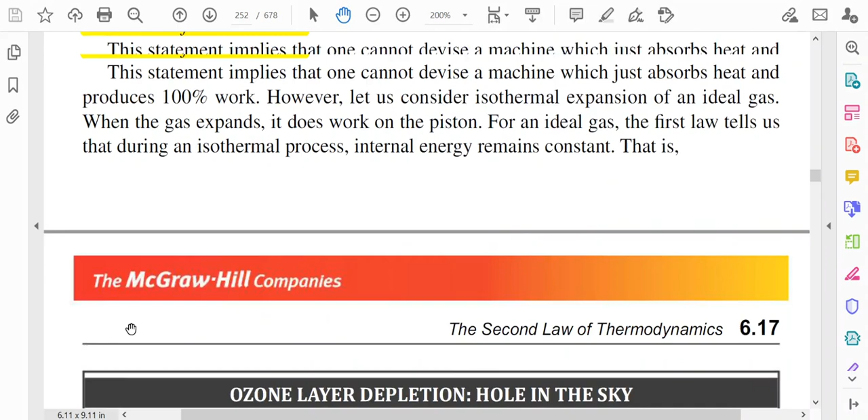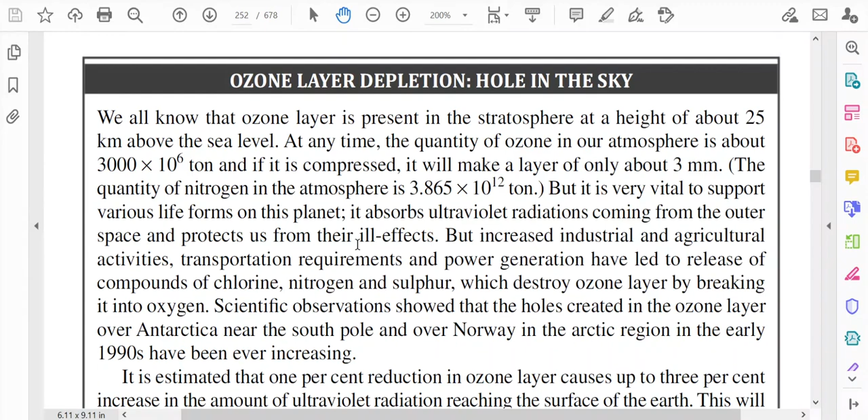Another thing that should be pointed out: we know about the ozone layer, and due to the emission of different types of gases from refrigerators, the ozone layer is being depleted day by day. So we have to think carefully about the working substance used in the refrigerator, and be careful about those refrigerants. This is something you have to take care of.

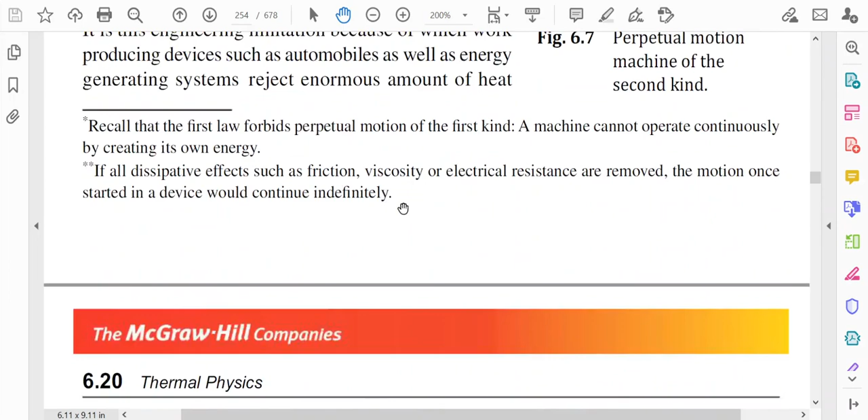Having analyzed the operation of the Carnot cycle, we can do two things: we can show that no real engine can be more efficient than the Carnot engine, that is, we can prove Carnot's theorem, and we can introduce the concept of thermodynamic temperature. We will discuss these facts in a later lecture. Thank you all for listening to this lecture.